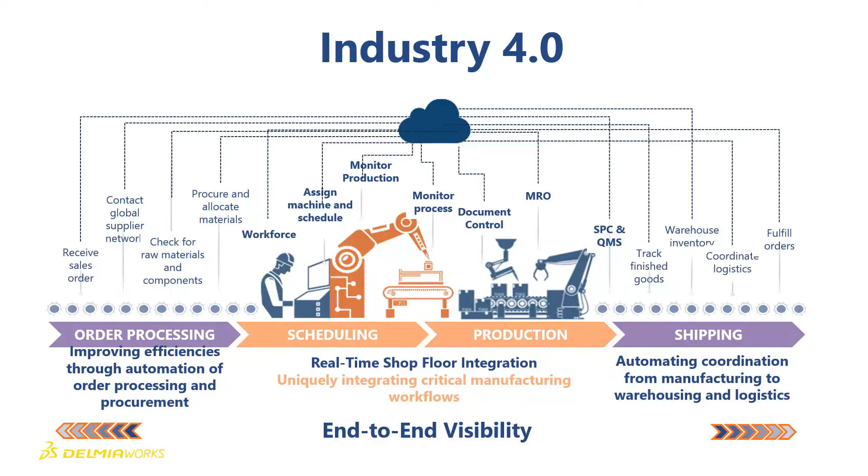All in all, the Industry 4.0 systems create the capabilities needed for smart factories. These are the same capabilities we know from the Internet of Things, like remote monitoring and track and trace, just to mention two of the key benefits.

Every one of these departments creates metadata that's used by other departments. They all share data, although they may not be aware of where it originally came from. The data either just appears on the company network or within your ERP system, but more than likely department employees need to go searching for it because current systems are disconnected, or not capable of linking front office data to back office manufacturing, shop floor, and all the data created there.

What that does is cost time, both in money and delay for product delivery to your customers. And we just can't have these things today, because things move so quickly, with a very fast reliance on getting things done and out the door.

The ideal system can handle your company's requirements from order entry right through to shipping - an end-to-end solution - greatly reducing the need for employees to run around seeking out information, asking questions, waiting for answers, or worse, getting conflicting answers, and then having to decide which one is the most opportune and best way to go.

Often these answers don't sync up, because the slice of time when the question was asked is different from the slice of time in which somebody gave the answer. The data can change due to the passage of time, and now the employee who asked the question has to decipher the answer and its true meaning. This can cause problems of its own - out-of-sync data is really a problem that most people don't pay enough attention to.

Let's look at where the data is generated, and also let's look at where your current ERP is actually capturing the data that is being generated.

Order processing, the start of the sales cycle. After all, that's where all the rubber hits the road. You receive an order, you complete it, your customer pays you. Simple, right? Well, there's a lot of metadata generated from the start to the end of the sales process alone. Quotes, purchase order numbers, inventory requirements, inventory POs, inventory move requests. Oh, and my favorite one, customer promise date. What date did we promise the customer that they would have their order that they just placed with us?

MES, or the Manufacturing Execution System, that's what the ERP does for the front office, MES does for the manufacturing floor. It gathers all the detail for production and process monitoring.

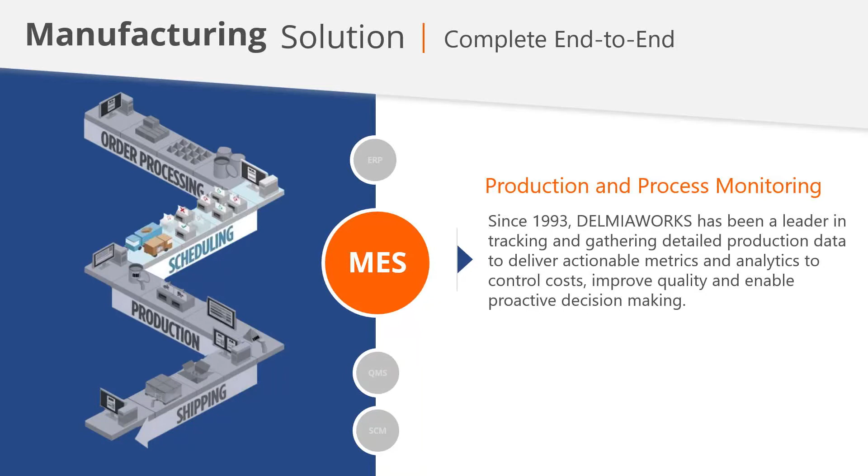So whatever you can do to ensure prompt, on-time delivery is in your best interest. The production side of the business is where the machines, the operators, the assemblies all rely on upstream inventory, procurements, and scheduling systems to not only ensure the components and raw materials are ready at the right time, at the right location on the shop floor, but also to inform you of the current status of any condition that might delay the completion of a production run.

There's a huge amount of data produced in the production floor, yet most companies don't make an effort to record it. If they do, it's in some other application that's not tied back to the ERP system's database. Or worse yet, it's an Excel spreadsheet, an island of disconnected data all on its own, like a dead sea of other data. And it's very difficult to try to connect those two together, especially in a timely manner.

How can important time sensitive decisions be made without all the pertinent data to inform you of a correct and concise determination? Not only are there data points like parts per minute, such as 9,247 parts completed of a 10,000 part order, due for a shipping date by October 7th for delivery to the customer no later than Friday, October 13th to meet a promise date.

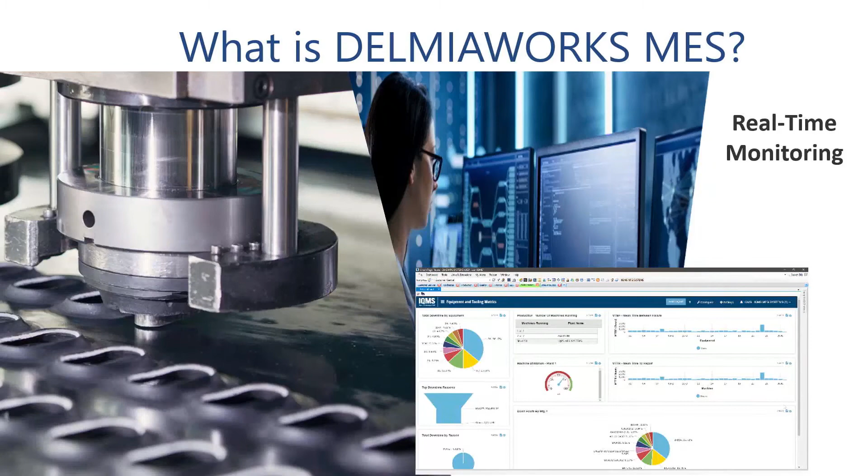So we spoke earlier about the data that's collected during the course of your manufacturing processes, or rather all the data that's generated, not necessarily collected. From a 30,000-foot view, we can see how all this data is relational with pertinent other data. How can clear, concise decisions be made when some or even most of the data is never considered because it's not within your grasp? That's where having a manufacturing execution system integrated with your ERP system makes reality much, much clearer.

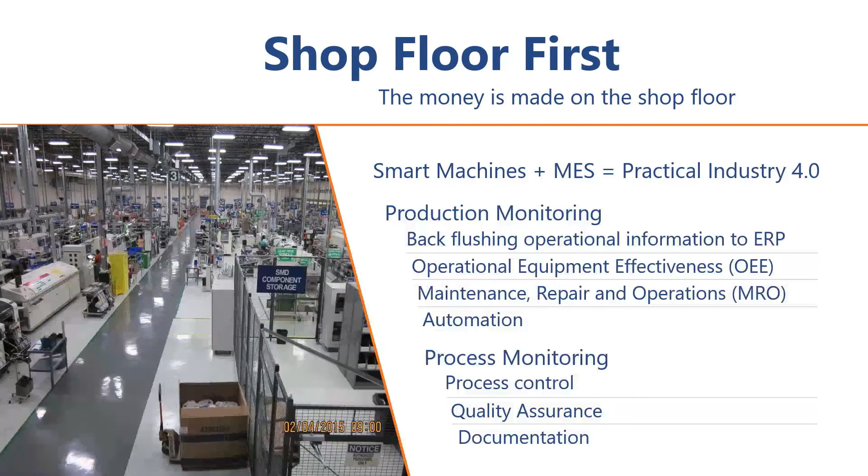When it comes to 3D design, SolidWorks has been the tool of choice for many manufacturers for many years. Now with DELMIAWorks' SolidWorks add-in, users can link part and assembly information to DELMIAWorks inventory, bill of materials, project management, and preventative maintenance modules for increased productivity and data error reduction.

For the DELMIAWorks menu within the SolidWorks software, your employees can link documents and drawings to DELMIAWorks records and then easily jump between the two systems directly into the appropriate modules. It behaves as if you're working within a single application. Now that truly closes the loop on digital transformation strategies.

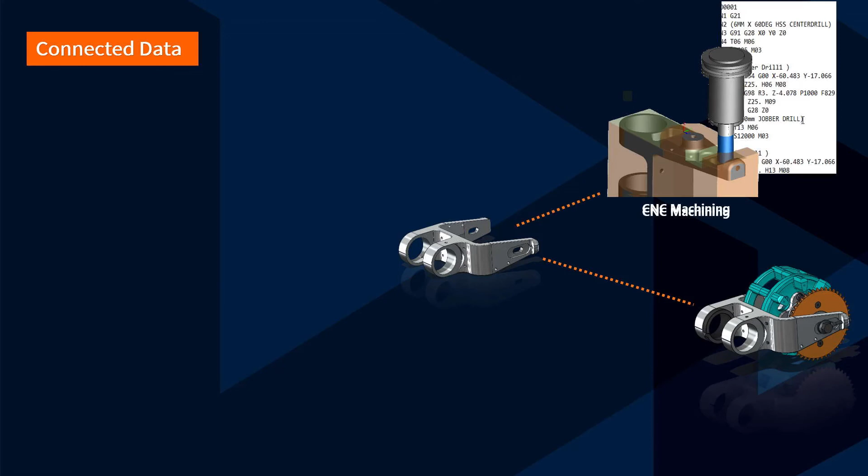Here's another link in the digital transformation strategy. Starting with the engineering design, there should be a digital thread that links all the data together. The CAD assembly model has threads that should be linked to the individual part models that make up the assembly. Each of these part models has threads that link to the parts drawings, CNC capable files, and so on. The assembly has drawings and BOMs.

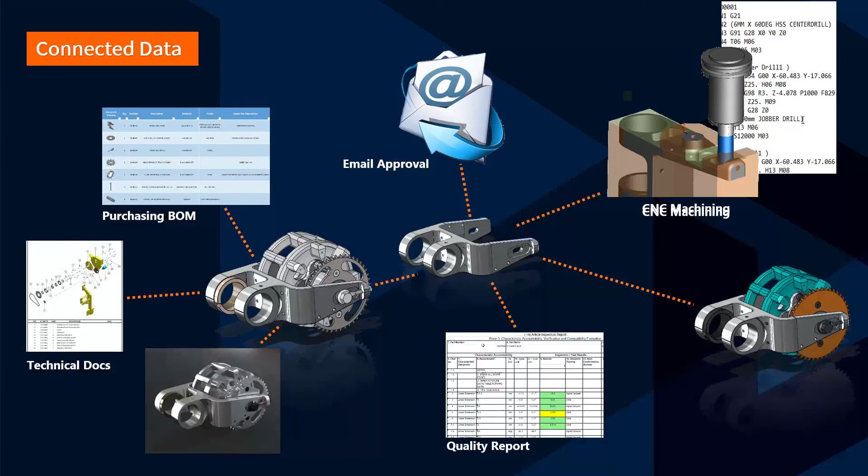Now that we get to different layers of the BOMs, there is the engineering BOM with all the engineering data required to develop the product. There's the MBOM, which is the manufacturing bill of materials, where the routing codes and all the required manufacturing information is. Sometimes this is referred to as a traveler or a router document, or instead of a bill of materials, it's a bill of manufacture. But we can also have a weldment BOM, third-party purchase BOM, machining BOM, and electronics BOM. There's all sorts of endless possibilities with that single thread bringing through right into the ERP and MES system.

This brings us back to the importance of a successful digital transformation strategy, where real-time data is easily accessible, allowing for better and more timely and precise to-be-made decisions.

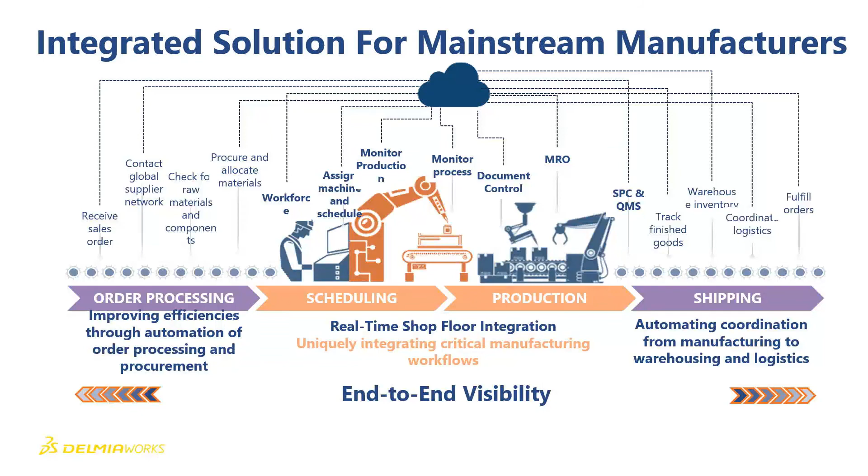We can see we're connecting the shop floor ERP system via MES can enable much more timely and accurate decisions to be made. Driving that elusive margin up, reduce the cost of poor quality, and of course, ensuring that the customer promise date commitment given by order entry can be achieved. Decisions that have to be made can be done so with an eye to the true costs, the profit and delivery promises without the data gaps or time delays that come with disconnected manufacturing floors.

We can see the benefits of Industry 4.0 processes with improvements on efficiency and quality while lowering our production costs. And of course, we ensure on-time delivery to meet customer expectations, all while ensuring scalable growth.

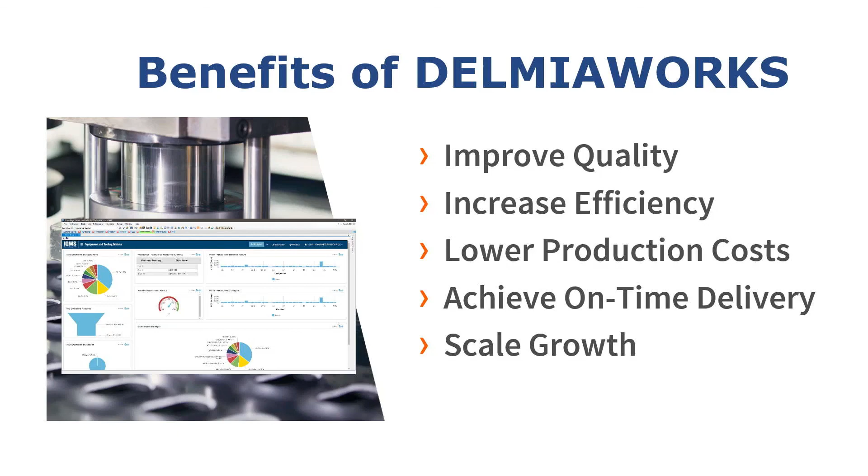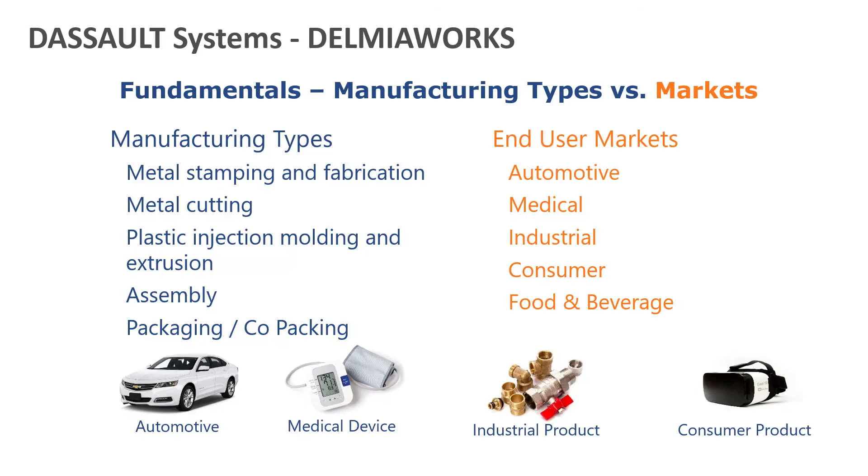DELMIAWorks provides reliable, real-time ERP and MES software systems developed specifically for manufacturing processes. Whether you're a small single plant manufacturer or a large multi-plant global manufacturer, DELMIAWorks has a manufacturing specific ERP software to fit your business needs. You deserve to have a successful digital transformation strategy at your fingertips, assisting you with those hard day-to-day decisions, ensuring optimum profits.